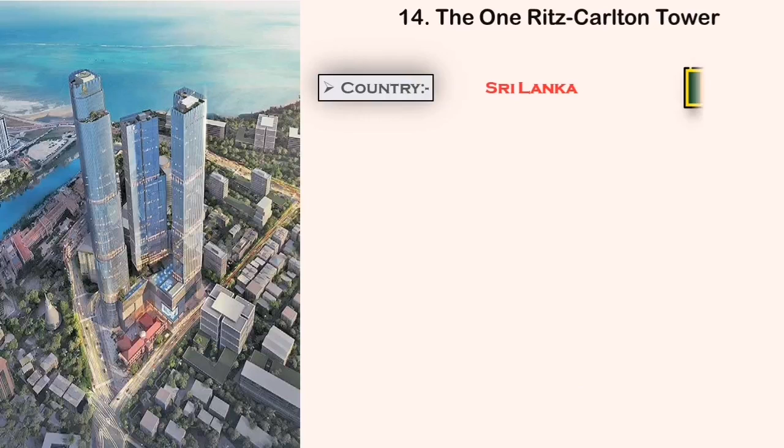Number 14, The One Ritz-Carlton Tower, will be built in Sri Lanka. This tower will be 326 meters in height and will have around 80 floors.

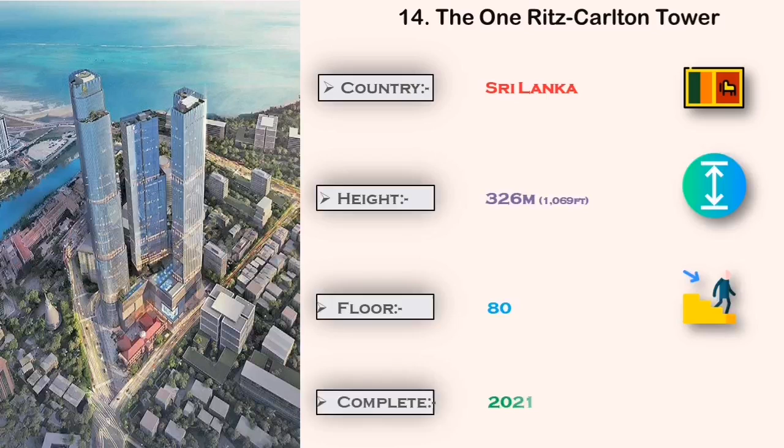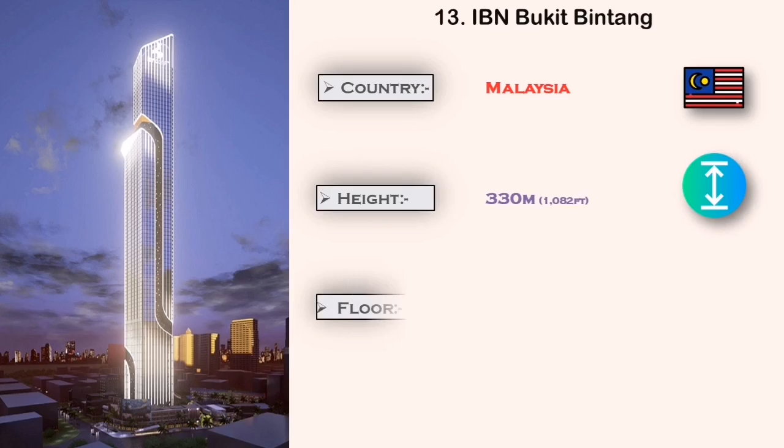On number 13, IBN Bukit Bintang. This tower will be built in Malaysia. It will be around 330 meters in height when constructed and will consist of a total of 68 floors.

On number 12, Empire 88 Tower, will be built in Vietnam. This tower will be 333 meters in height and will have a total of 88 floors.

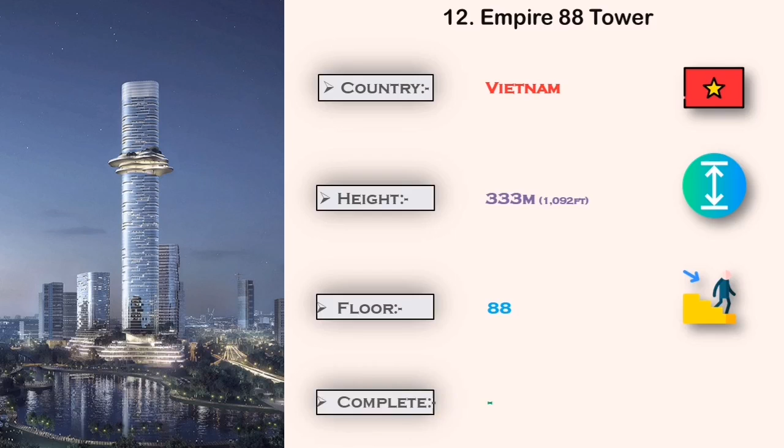Number 11, 9 DeKalb Avenue. This tower will be built in the United States of America. It will be 335 meters in height and will consist of a total of 73 floors.

Number 10, Seal Tower. The Seal Tower will be built in UAE. This tower will be around 365 meters in height and will consist of a total of 77 floors.

Number 9, Uptown Tower. The Uptown Tower will be built in UAE. This tower will be around 370 meters in height and will have 78 floors.

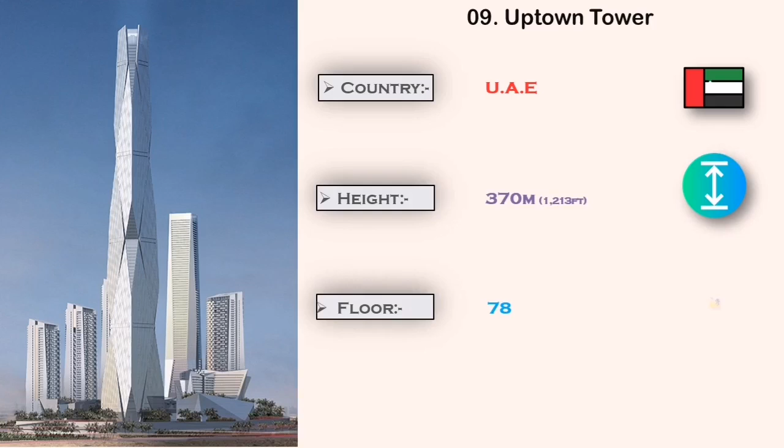On number 8, Peruri 88. The Peruri 88 Tower will be built in Indonesia. This tower will be around 389 meters in height and will have a total of 88 floors.